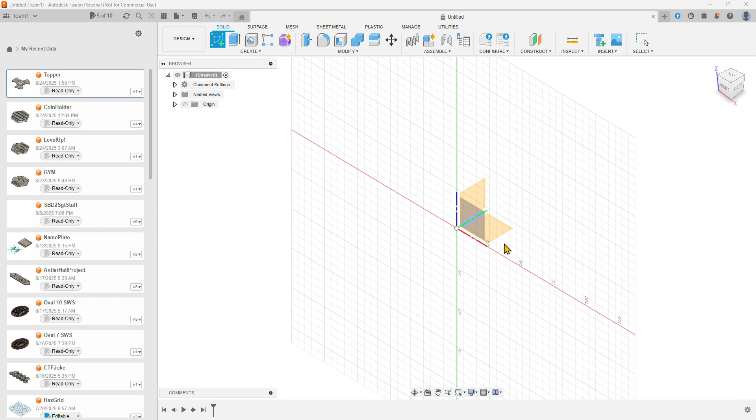Alright, so let's start with the easiest concept. Let's go ahead and make some wall signs.

First things first, I'm going to go ahead and make a polygon. I know that for all the hex panels that we have, it's 180, so I'm going to make this 90.

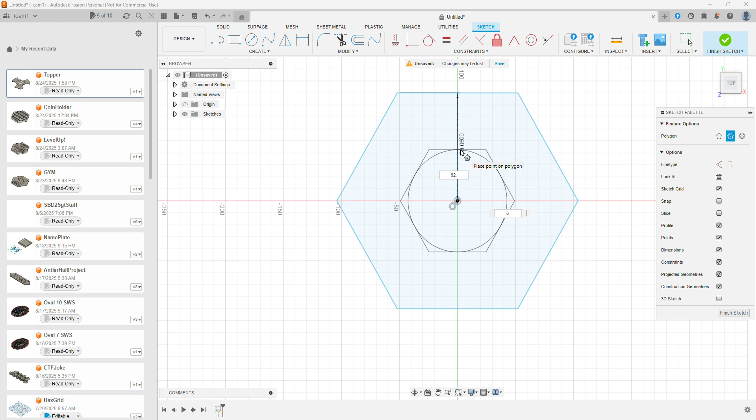And then for the panel inserts, let's go ahead and create another polygon. Inscribe polygon, and this one is going to be 92.5. Yeah.

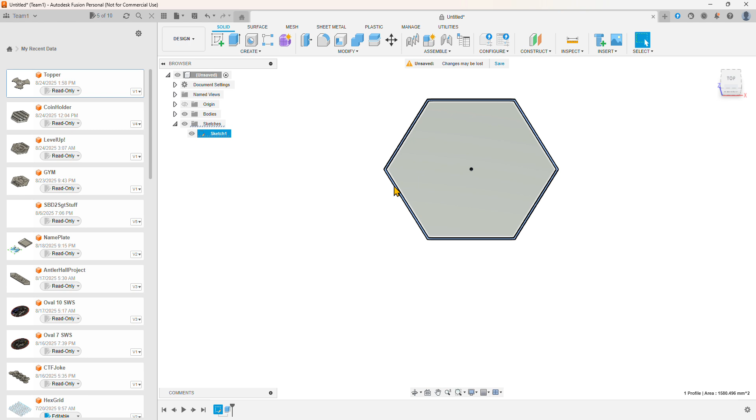So this right here and this are selected. Let's go ahead and have -1. Okay. And then, whenever I did the extrude, the sketch disappeared because it figured, okay, you don't need me anymore, but I still do need it, so I'm going to unhide it. I'm going to select that. I'm going to extrude this to make the panel.

How does 5 look? 5 doesn't look like it's enough, so 10. Yeah, 10 looks good. Okay, cool. Join that. This is now one body.

I'm going to go ahead and select all these sides, make myself a chamfer, just because it's going to make it all look a little better. How's one look? One looks perfect.

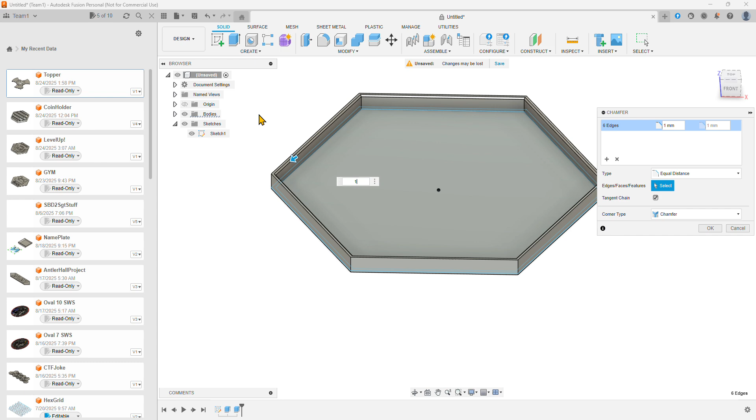Okay. And then I'm going to hide that sketch because I no longer need it, but I'm going to make a sketch on the inside.

Let's go ahead and make these. Since I selected this plate right here, like the bottommost portion, if I tilt this off to the side, you can see that it actually selected through and didn't select this top part. It actually selected the bottom. So that's an important thing to note.

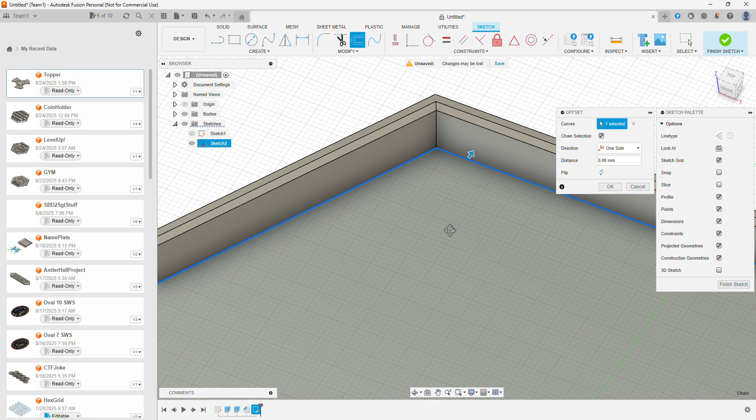Let's go ahead and make this -10. Yeah, sure, that looks good.

And then let's go and create arc. Actually, wait a minute. I can create an arc, then use the midpoint as a reference. There you are. The midpoint is that triangle right there.

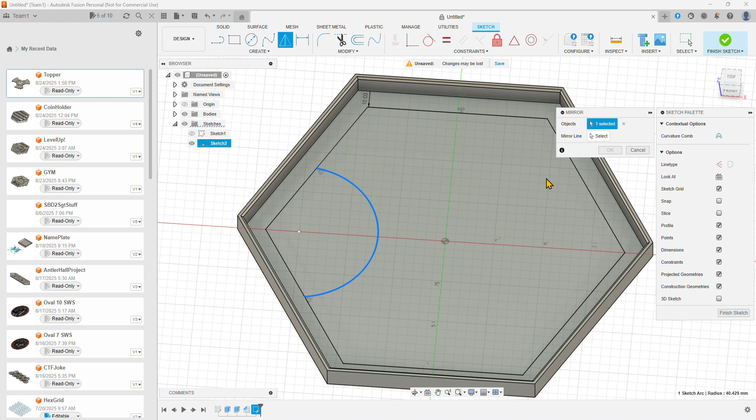You're not going to make this easy, are you? Okay. And then, can I actually make a mirror? Yes, I can. Okay, so I'm going to make the mirror line. Give me back my origins. A mirror line is this plane right here. Okay, I now have these.

I can extrude this solid, extrude, -20. Cool. Bada bing, bada boom. Well, look at that. I've got a hex panel backing that I can use.

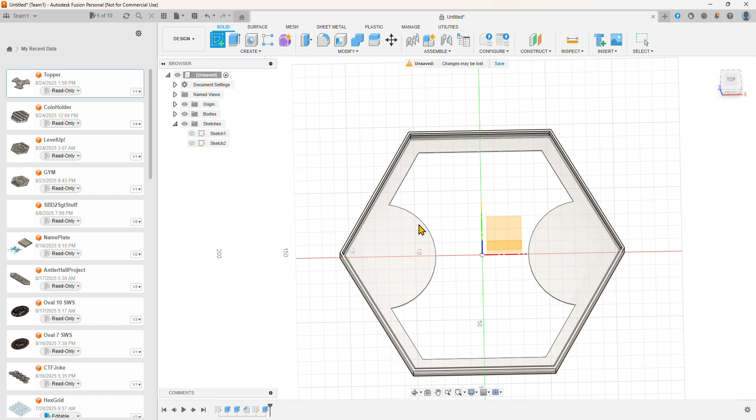Now, I am going to use this just to get it started so that everything's lined up. But now, I no longer... Oh, wait. No, I do need you. I no longer need the body, though. I can just go ahead and call this panel. Good.

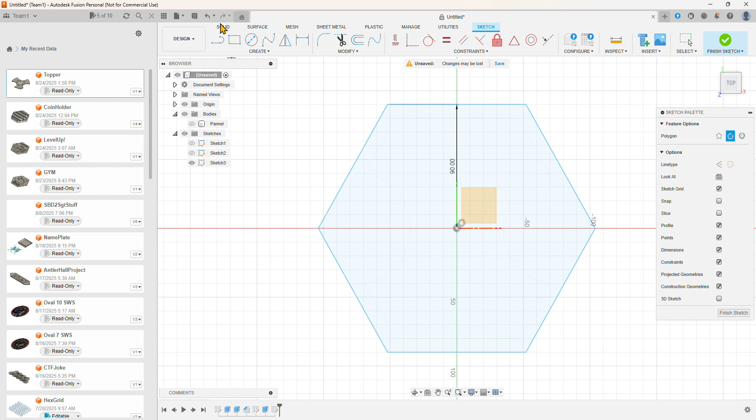Now, I'm going to go ahead and make an inscribe polygon. I'm going to make this 90 as well. And then, let's go ahead and make this quite simple, shall we?

Let's make this first a navigational sign. So I'm just going to make this arrow. Oh, midpoint's right there. So since I went to the midpoint and highlighted it, then my cursor automatically is in tune with it. So just bring that out a little bit, bring this on down.

How far away is this? It's gonna help me out. Oh man, I can't quite do that. But what I can do...

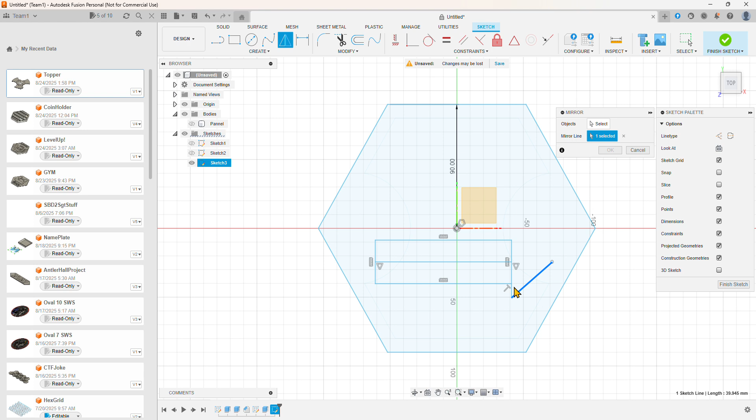Is I can go and do this, and then create a mirror. I can select which lines I want to mirror. Let's select those two. Oh, come on. Oh, shoot. Whoops. There we go. Those two, mirror line, I don't want that. I want this. So now everything is symmetric.

Look at that. Let's just love it. I'm going to go and create text. Let's go and say...

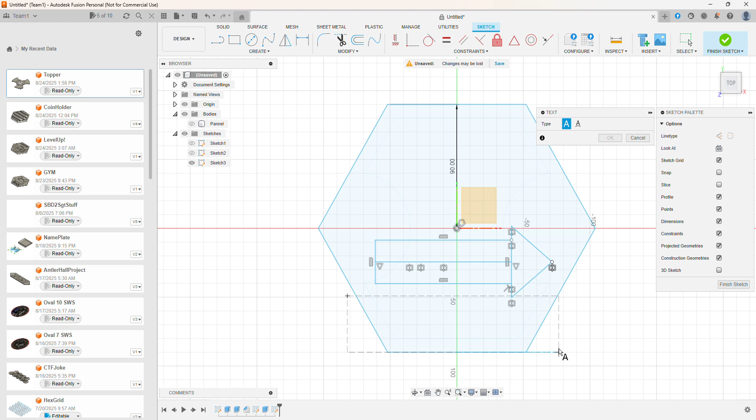Free food. And then at this point, I would go ahead and get an SVG of something that would be reminiscent of food up there.

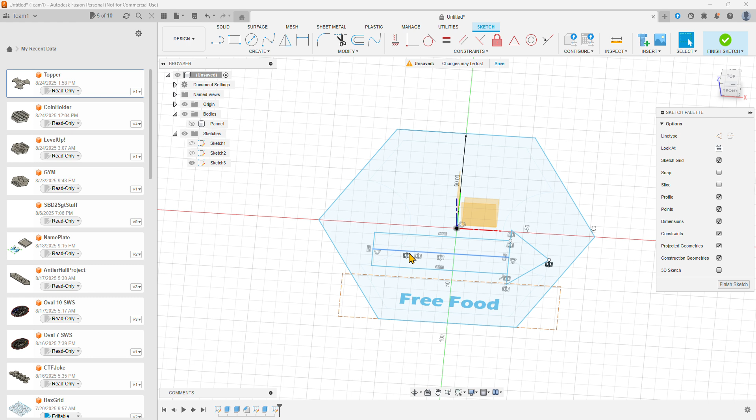This is a creative sketch on top of the other one, it's still referencing that sketch. So that's annoying, but I can work around it. Okay.

So extrude. Okay, so when you're extruding these hexagon panels, keep in mind that if you extrude it about 3 millimeters, it has a very high likelihood that whenever it comes off the build plate, if you take it off too soon, it could potentially warp. Things like 5 millimeters are going to have a little bit more structural stability, and things like 10 millimeters, there's absolutely no chance of it warping whatsoever.

Don't worry, if it's a thinner piece, then you just need to let it sit on the print bed for a little while longer, or you need to snap it off immediately, and not overly bend the plate while it's still warm. With these large hexes, since they take up the entire build plate, if you do just let it sit there whenever it completely cools off, then it will automatically delaminate itself from the build plate, so it will just slide off the machine. But if it's still warm, then it has the chance to warp.

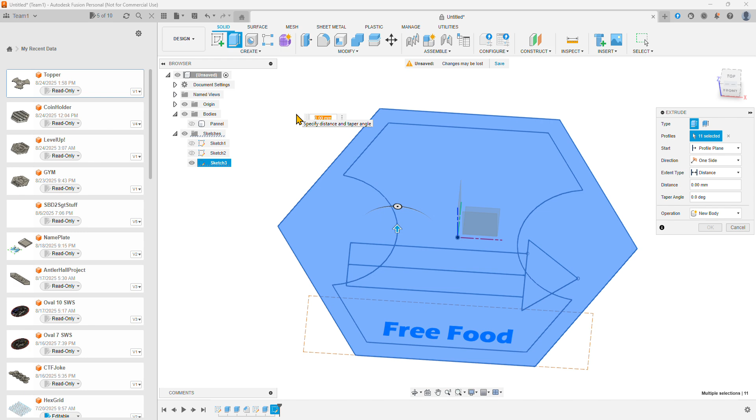So, I'm going to go ahead and do 5. New body, okay. And then I'm going to go back to the sketch because I'm not done with you quite yet. But I can't easily access the sketch from this side.

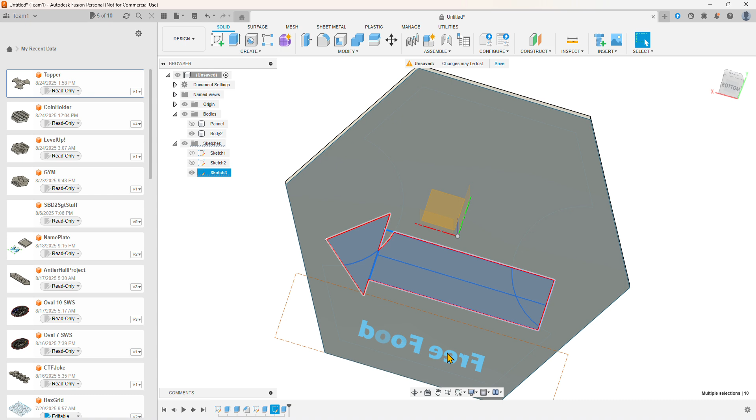If I flip it over, I can still access all the individual pieces. But if that's too much of a headache for me, like for right now, I'm trying to select this text right here and it won't let me. I'll go ahead and hide the body, flip it over, and now I can access that free food because the other sketch was blocking me from doing that.

So now I'm going to extrude all of that. Oh, I missed a piece right there. I'm going to go extrude all that. Let's go and do 10.

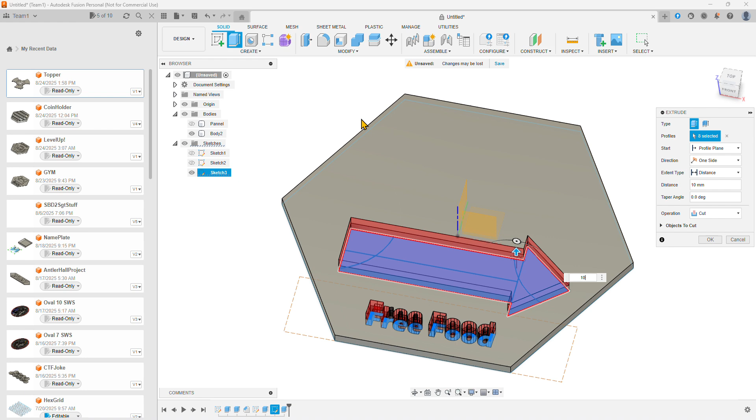So it's 5 above. Now, since it comes from the bottom and goes through the top, it's automatically going to select cut. I want it to join. Okay, cool. And now I can go ahead and hide that, and bada bing, bada boom. Yeah, let's go ahead and hide the origin as well.

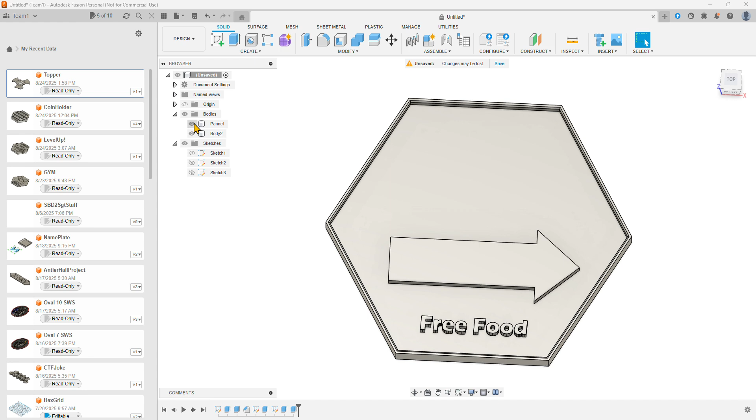I don't know, I'd add an SVG of a cheeseburger or something up here and call that good for a navigational hex. You can go ahead and see that panel for reference. Yeah, and that is just how easy that is.